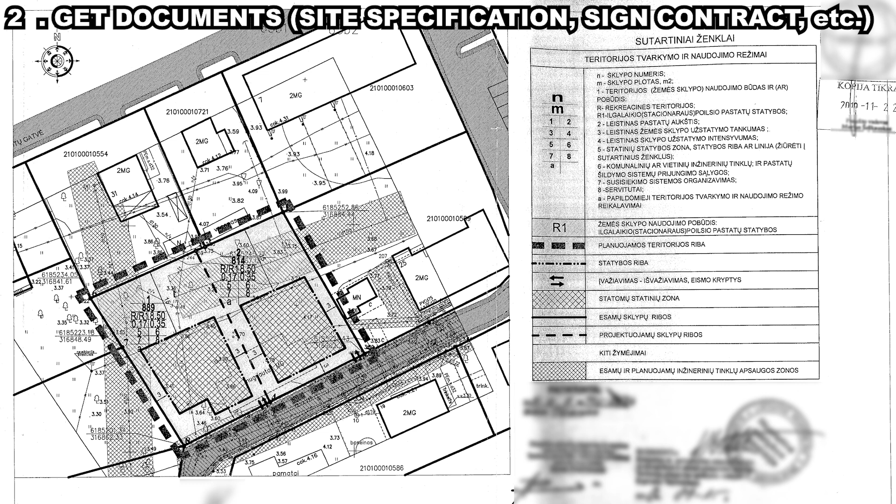This is basically all of the measurements of the site. The most important ones are the restrictions for how intense the site is, as well as, of course, the size of the site.

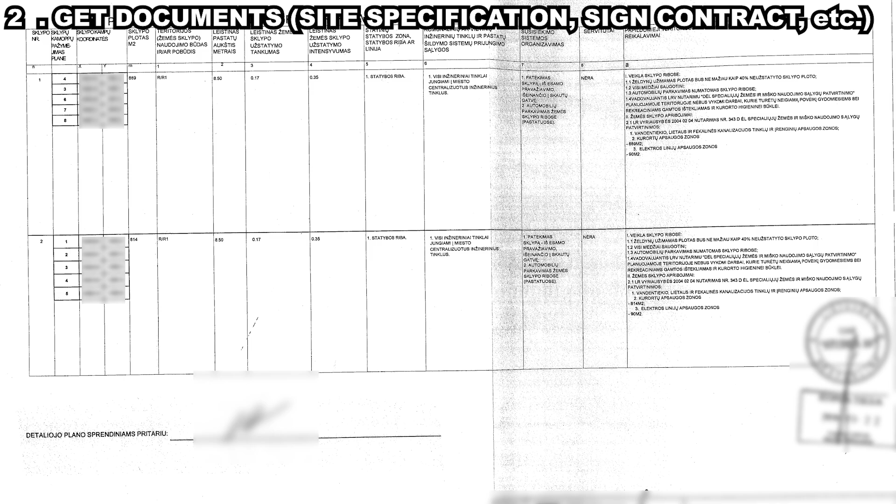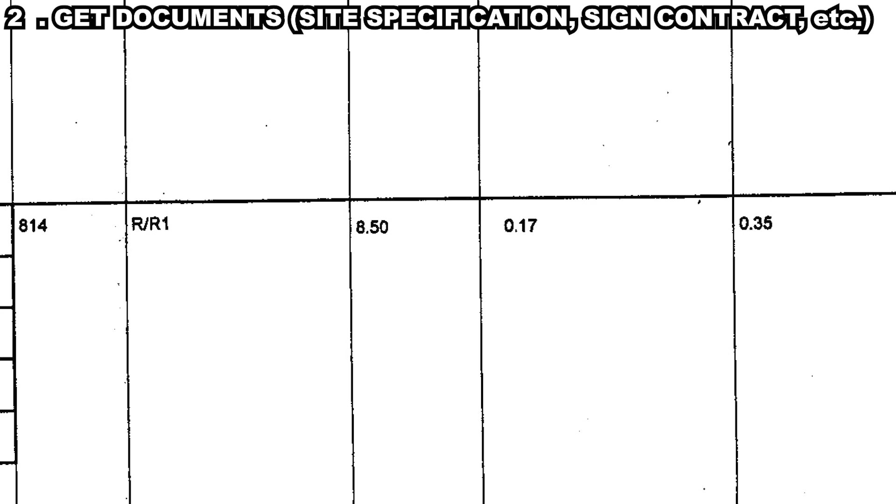As for intensity, currently the density is set to be 0.17, and the intensity of the site is set to be 0.35. That means, let me grab a calculator - if our site is 814 square meters and we multiply it by 0.17, that means the footprint of the house, together with all of the consoles, everything sticking out from the house, cannot exceed 138 square meters. That means this is a very small house.

As for intensity, that is the cumulative floor area of the building divided by the site area. So if it's 0.35, then 814 multiplied by 0.35, we get 284 square meters. So we are basically forced to build high with a very small footprint. It's a given that this is going to be a 2-floor house.

This is a very important document that I will be referencing quite a bit throughout this initial design stage, where I'm just getting accustomed to the site. The last official document we got is just a register center document, confirming the site is registered in the Lithuanian register center - that one's unimportant.

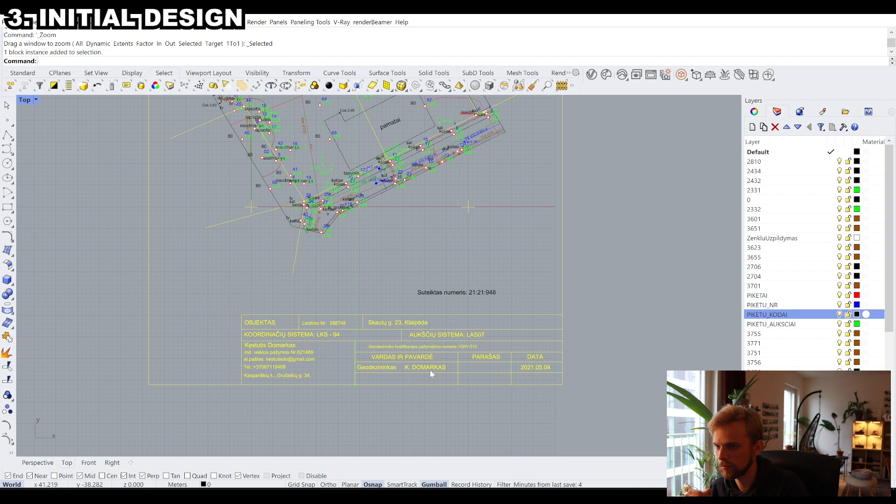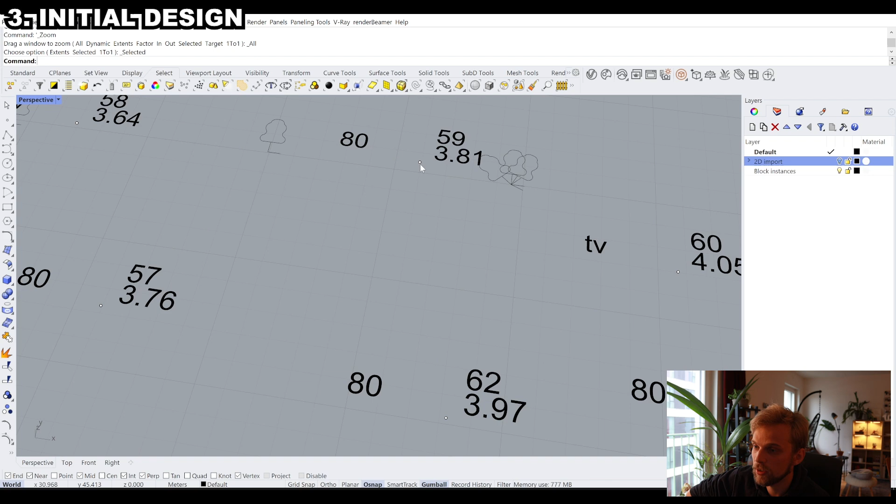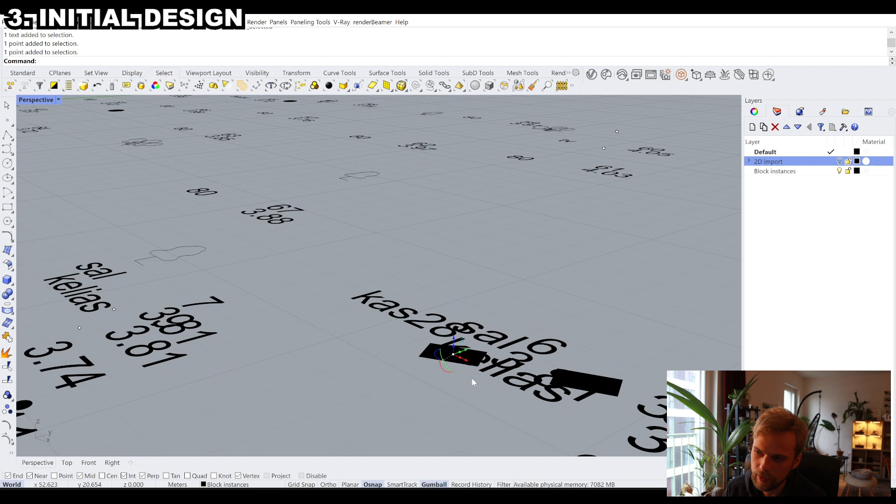During this initial design stage, how I like to work is by first rebuilding the whole site in 3D, just in case the site is hilly, to check the topography, or if there are any trees that need to be kept. As I went through the documents, I found that every single tree on the site will need to be kept - that was a very important statement to react to. So here I'm rebuilding the site, placing the trees, finding the different altitudes. Thankfully the site wasn't that hilly, so at least that wasn't an additional limitation.

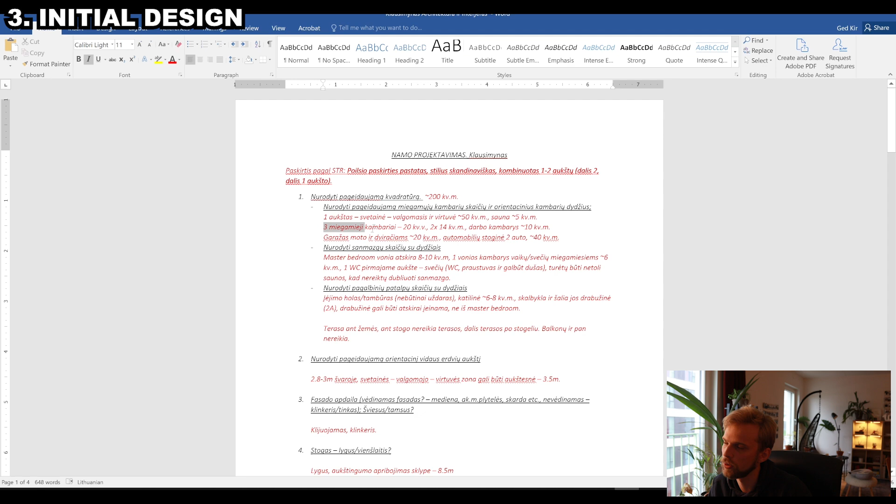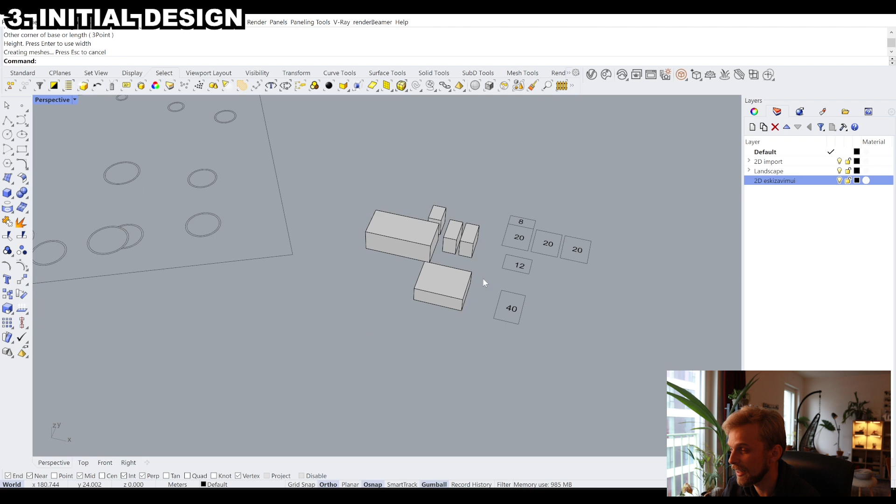But we talked with the client about the huge limitation of the site density, and they said they will try to push the site density to 0.23 rather than 0.17, which would bring us closer to 180-190 square meters for the footprint of the building. That's much more reasonable and will unlock more design decisions, more drastic design decisions, because with a small footprint you can't really do that much.

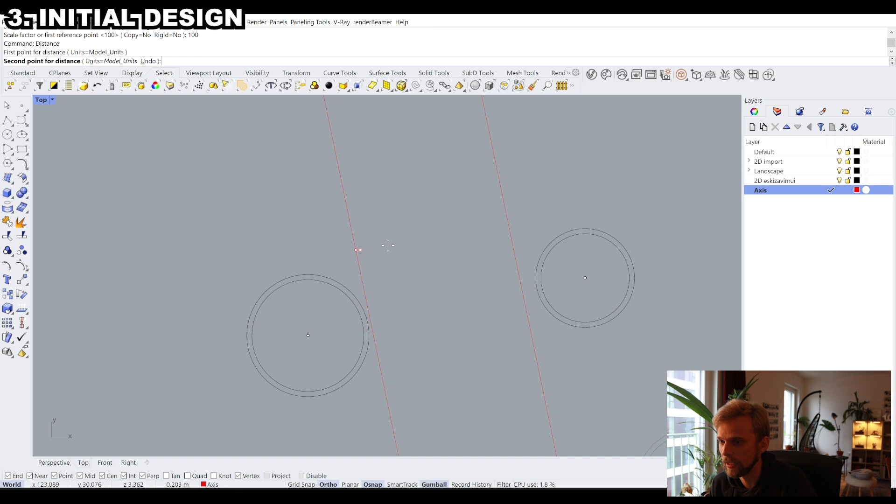So here I'm finishing up the site and starting to create first sketches. As you can see, there's a big tree right in the middle of the site, so this immediately dictates what kind of building this is going to be. We can either do a U shape where the tree is in the courtyard, or a cross shape, but the building will need to somehow go around the tree. That's where I initially started sketching different ideas.

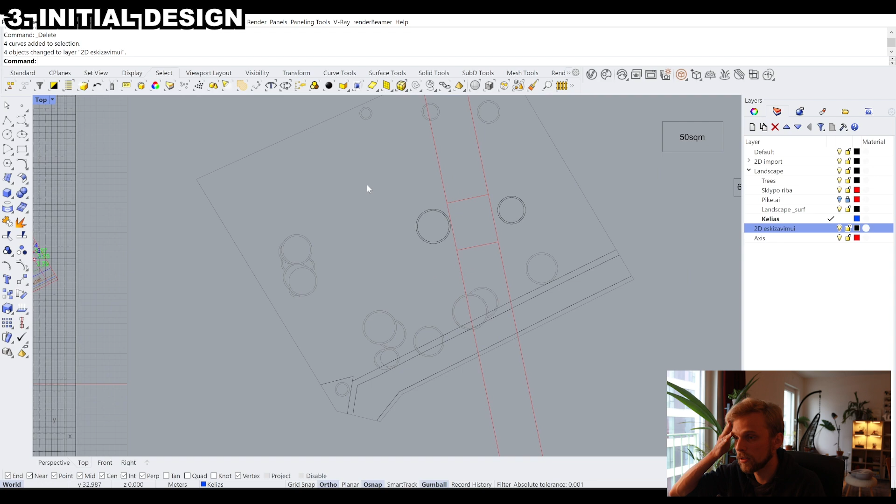I'm going to show you the final result without showing the overall sketching process, because I don't think that's necessary. In total we came up with 3 versions. I came up with 2, and Olga came up with 1 more. We already had our first discussion with the clients.

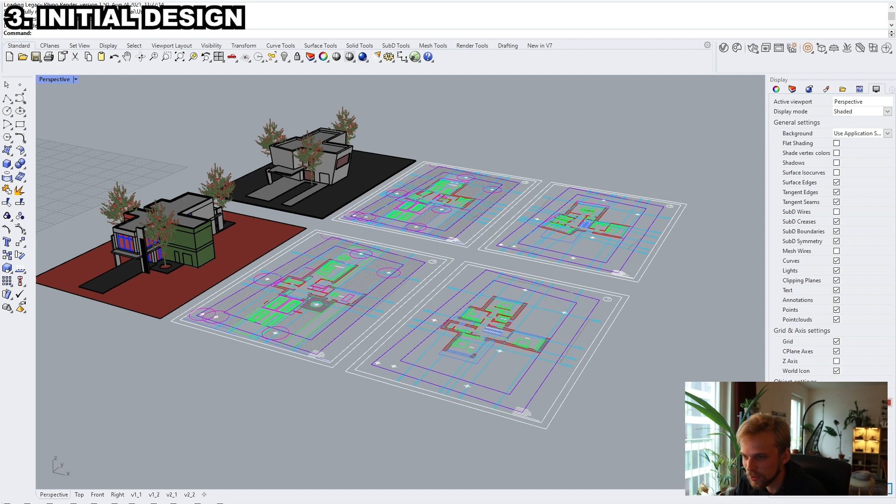But I'll keep it a secret for now. I'm going to go through these versions real quick. The first one will take the longest, but the other 2 will be faster. So I'll start with my version 1, which is this guy right here, maybe switching to Arctic view. Yeah, there we go, this building right here.

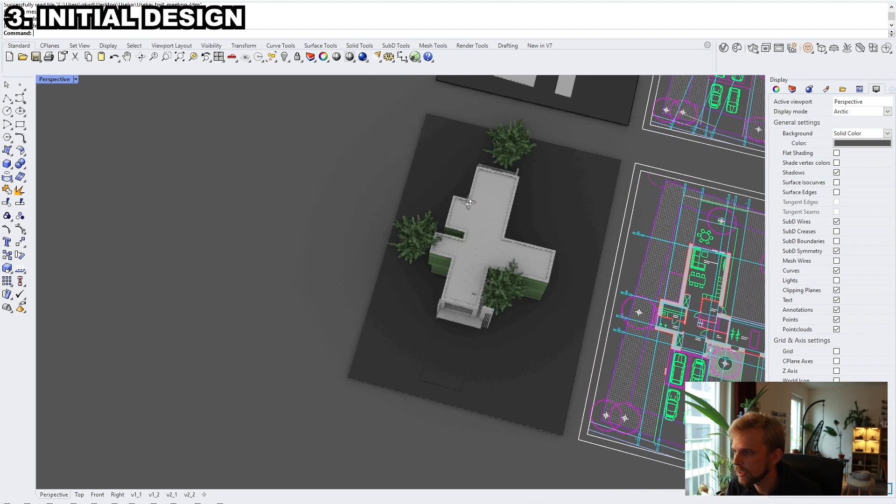It's basically a cross shape. We have a cross shape, and we have this one tree that we can't get rid of. Well, actually 2 more trees were also limiting factors, but this one was the most intense one to deal with.

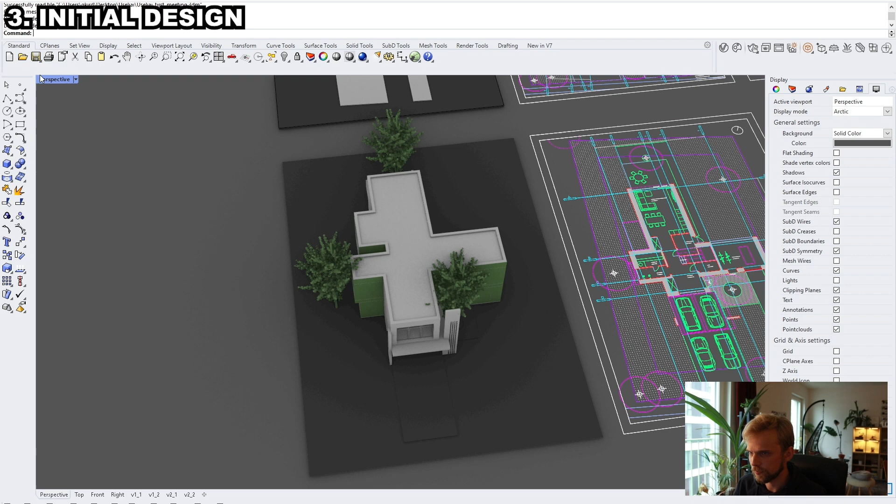So just looking at the drawings, I think I have a PDF open. Yes, I do. Looking at the drawing, we have an entrance right here. By the way, they wanted parking for 4 cars, 2 of them protected from the rain. So you have your parking, you have your entrance sequence right here.

The hallway where you can put down your clothes. You have your shower and the sauna block, and the shower gets a large window with diffused glass, overlooking one of the trees, which I think would create a pretty interesting shimmering effect, because the branches of this particular tree are quite low and it has multiple stems.

North is located in this direction, upwards. So the evening sun will indeed hit the tree, and the shadows would fall in here. That's the first interesting moment of this particular design.

Then as you go through the hallway, you can access the boiler room. The boiler room needs to be pretty big, and it's tucked away underneath the staircase. Then you have the bathroom right here, and the garage for the motorcycle, where you can also fit bicycles.

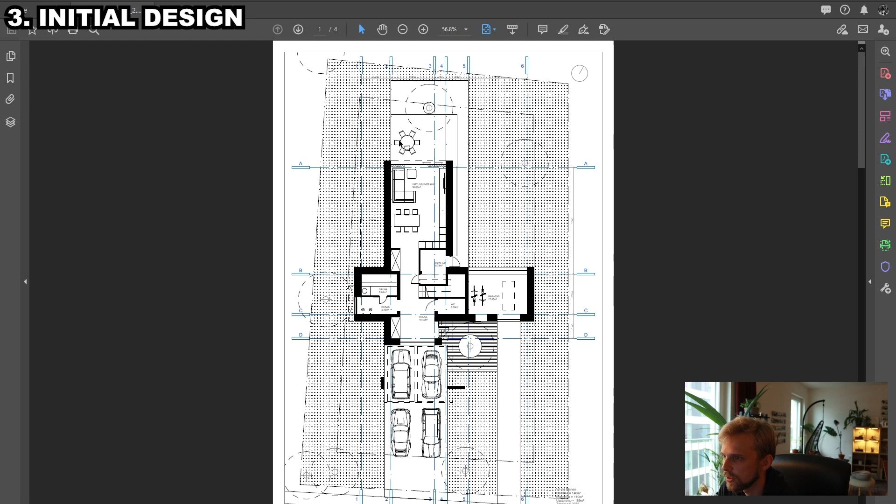Everything else is fine. Then you have the terrace and one more tree right there. If we look at the second floor, you go up and access it, and you have what's a pretty weird area, which I can show you in the 3D model.

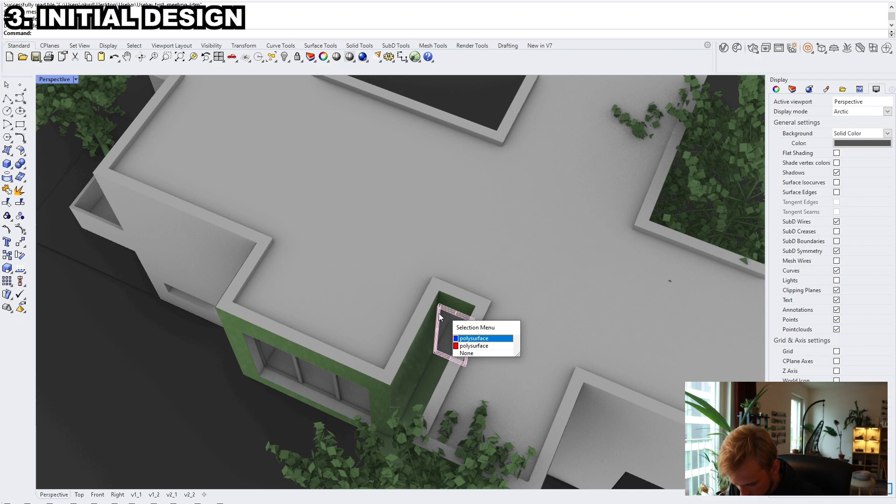It's right here - this window, which leads to nowhere. That's a pretty weird area to have. But again, it shows the tree, gives you that nice evening light. It shines light onto the staircase, and it purely creates this nook.

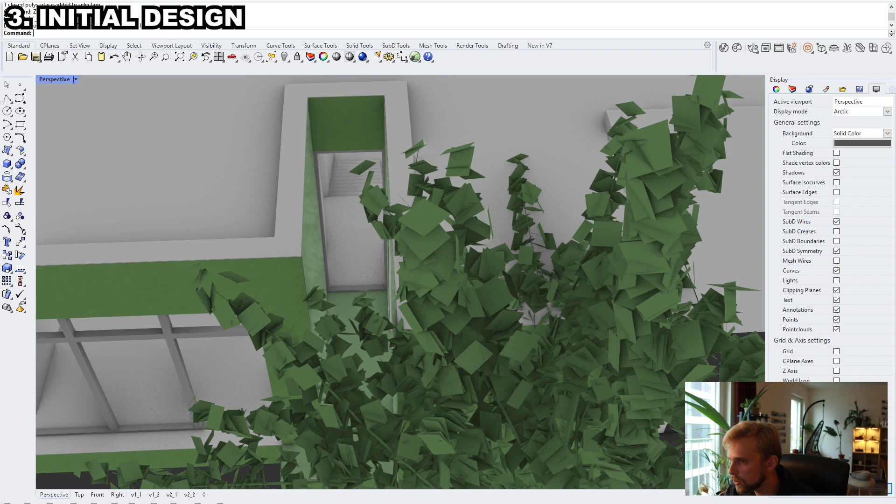I just showed pillows in that nook right here. It creates this nook in which you can just cuddle up and read while you get a little bit of that evening sun in there. I just find it to be romantic. I don't know - would be a bitch to clean though, honestly.

Anyway, moving on, you have the workroom, the office room so to say, and the cloth room I guess, where your washing machines are - these two rooms here. Then you have bedroom 1, bedroom 2, bedroom 3, 3 bedrooms total, pretty generous with the square meters for the bedrooms. And you have the bathroom that serves the second floor with the walk-in shower.

So that's the initial design. The most interesting part about this design is indeed the left-hand side area with this particular tree. Everything else is kind of okay.

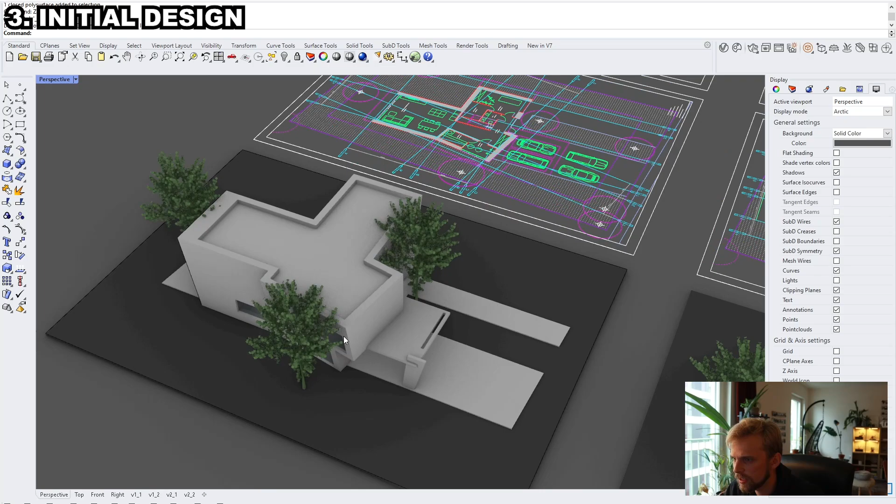Then I decided, what if the client is a crazy one and wants to go a little bit to the weirder side? What if we start working with angles? Given that, I decided to do a second iteration of the design, which was this thing right here, this building right here.

Just quickly showing it to you. So it kind of has the same language as the initial design, only now we are dealing with non-90-degree angles and a little bit more intense plans.

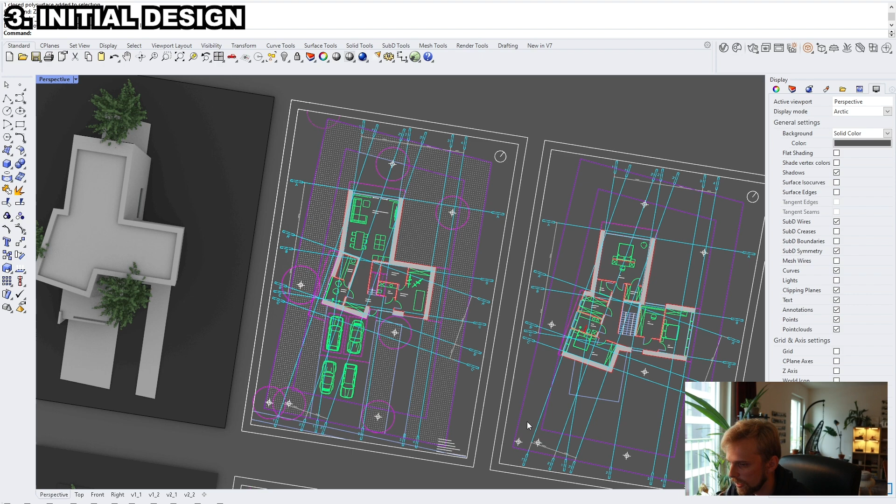So just to quickly guide you through those. Basically, the entrance hallway requires us to take this whole area right here and rotate it just slightly so that this little hallway area opens up and creates more space for you to take off your clothes and so on. Then you have your shower and the sauna right here with the same logic of looking at the tree.

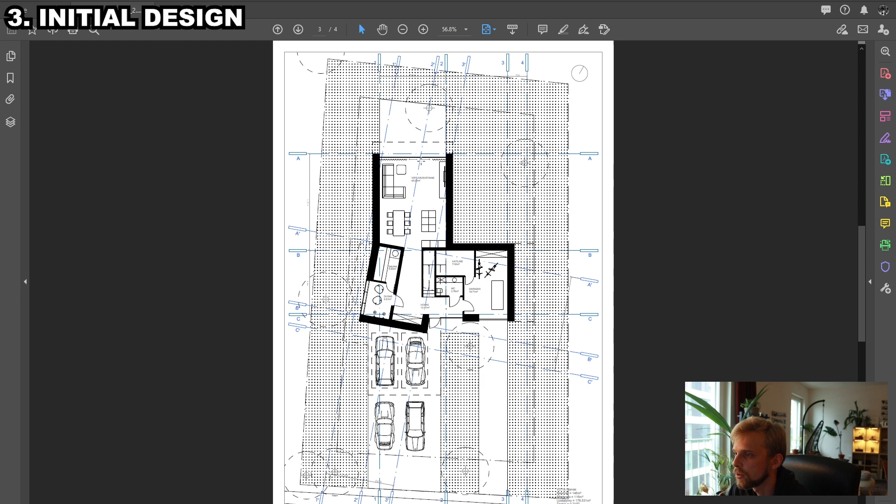The parking logic is the same. The garage is kind of the same. Most of this is the same, but now you get a much wider area for the living room and kitchen, which enables you to create a kitchen island, which I think is a much nicer thing to have than a corner kitchen, right? So this is already a better solution.

And then you have the second floor, which is basically the same thing as we saw before, right? So the second floor didn't change much. So that is the second iteration, second version.

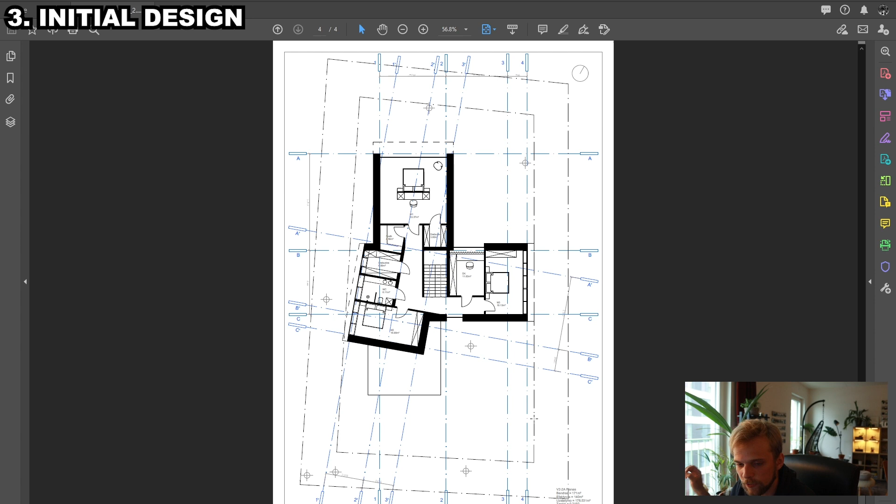In terms of the numbers, the numbers for us to stay in are 0.23. Before it was 0.17, now it's 0.23 for the density of the site and 0.35 for the intensity of the site. So the density of version 2 of this crooked version is 0.22, and the density of version 1 is 0.20, right? So we're well within the range of what's acceptable, even though current density restrictions are 0.17.

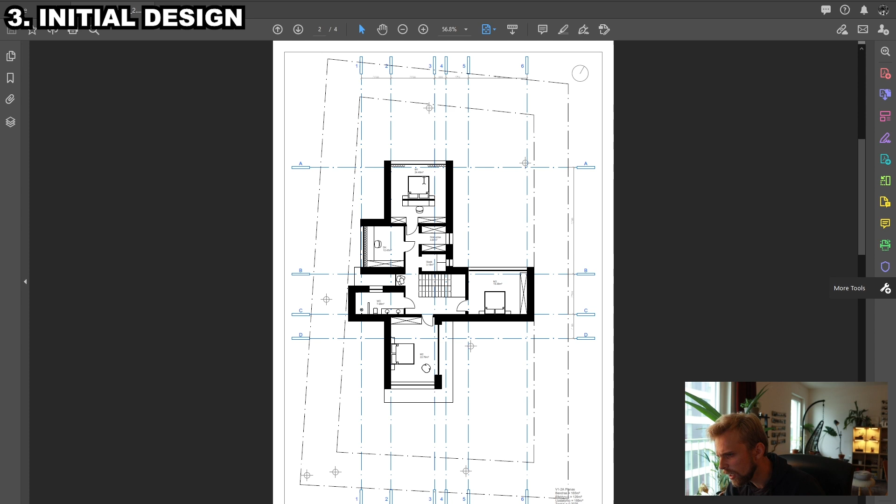And neither one of these designs could be built, right? So we will need to wait and try to apply for a change of rules to the municipality in Lithuania. So that is that, right?

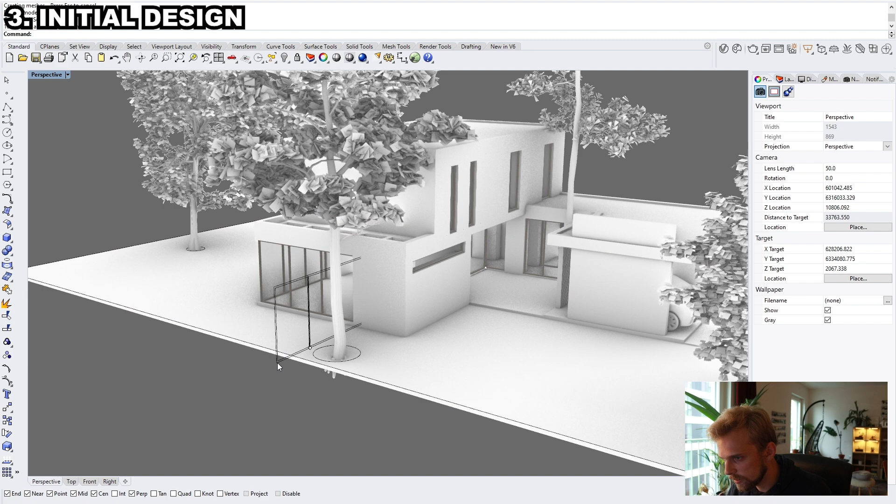Again, two designs. The third design that Olga has done is right here. I should also change this to Arctic view. There we go. Let me just... why can't I select these curves? So SelCrv just for a second, hide. Come on, sorry about that.

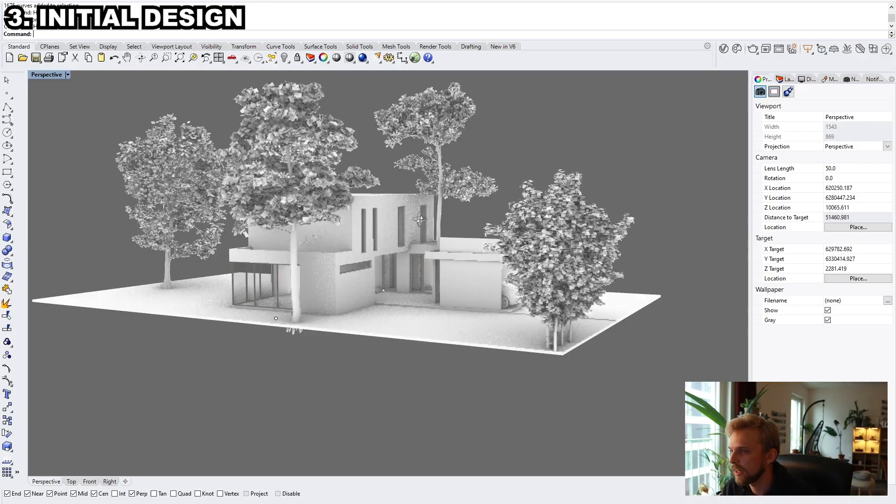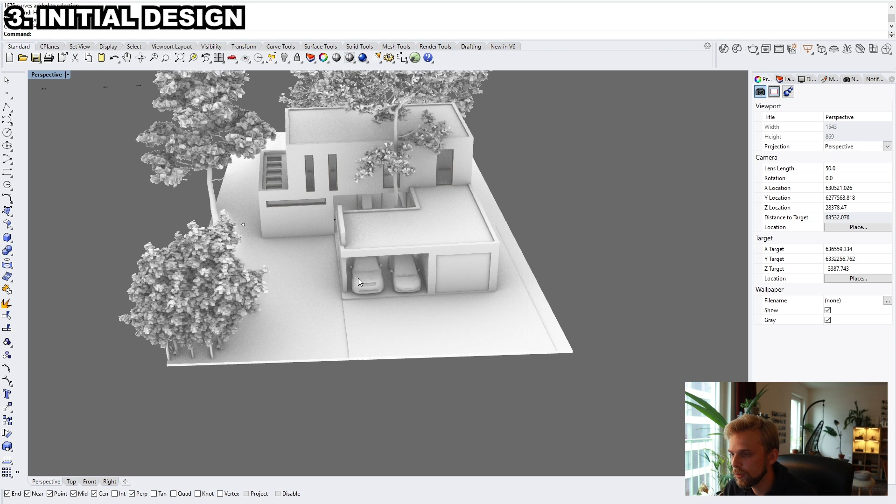So this is the initial design from Olga's part. A much, it's a completely different take on this, right? So here I will draw a cross right here. Instead, Olga has hugged the tree with her building, and she has space for 2 cars underneath the roof and 2 more cars right here.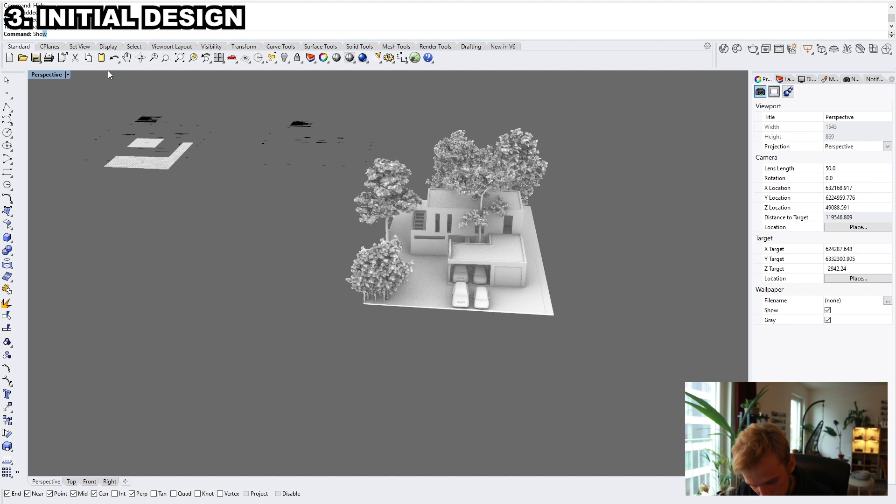And then you have the rest of the building. So only this portion here is 2 floors, right? Everything else is 1 floor. This is the design. And if we look at the drawings, which I have right here, the basic principles are the entrance to the building is right here.

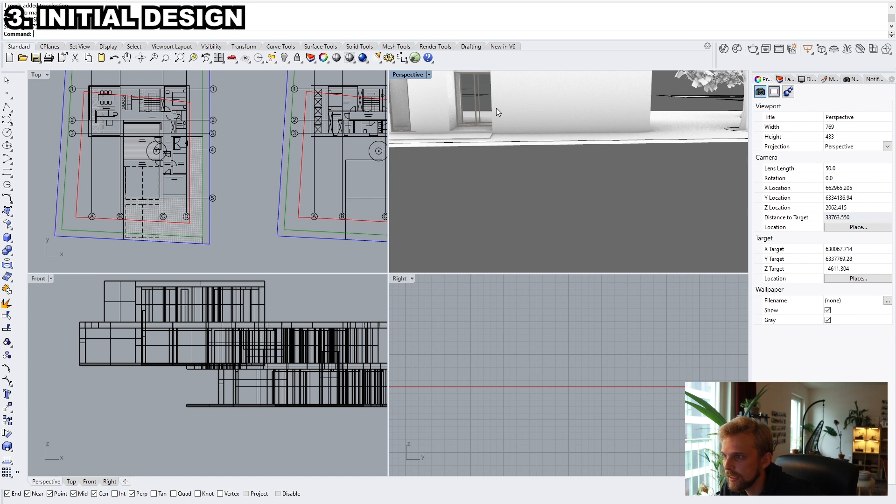I will also try to show it to you here. The entrance is right here, and it's a see-through entrance, meaning that as you enter, you can go through the volume of the building and enter the inner courtyard straight up, right? So this is a pretty nice solution. Pretty nice solution right here.

The hallway is pretty small though, doesn't matter. Then we have the boiler room and the garage right here. So all of the technical stuff is located right here in this area.

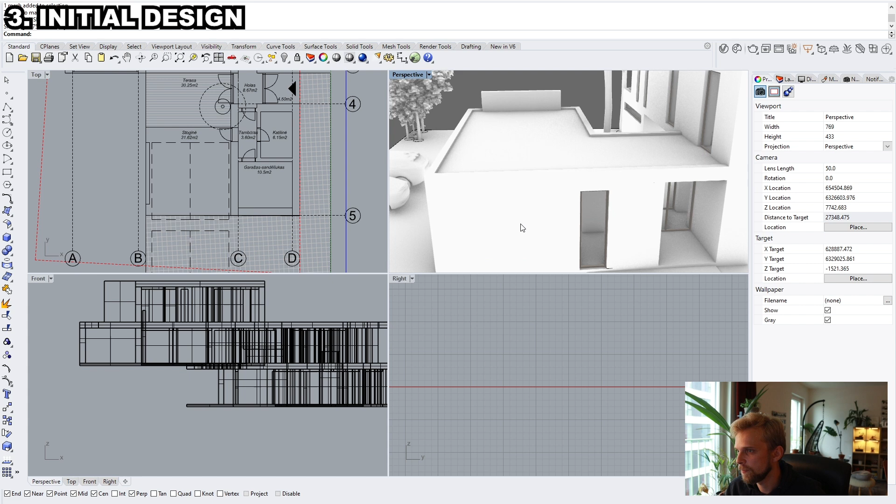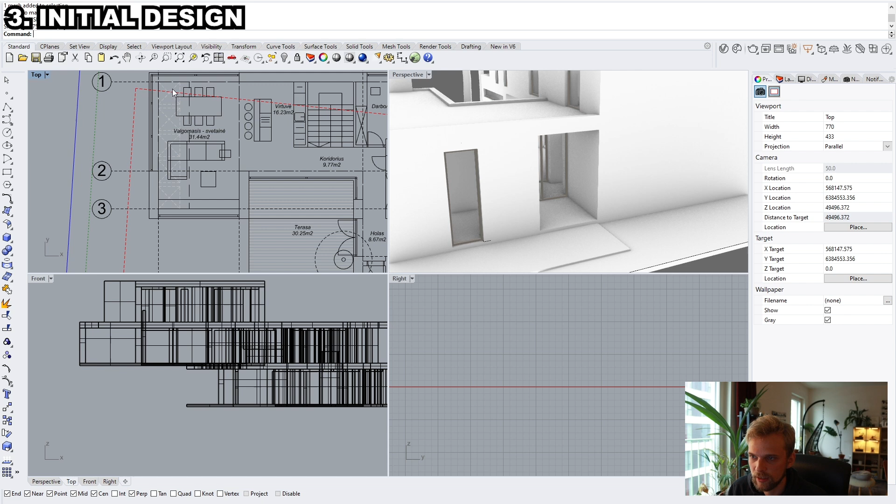And then as we enter here, first we are greeted by the sauna and the bathroom. The sauna and the bathroom are located right here. And then we have the workroom, the office space right here, the stairway to the second floor, and the kitchen with the island and the living room situation with a corner window, which is right here.

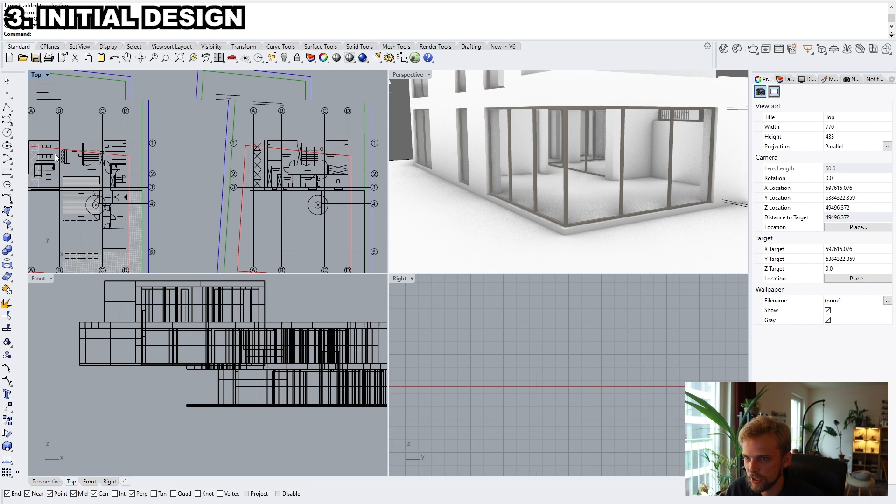You can see that currently the designs are empty. We don't spend unnecessary effort on something that will be changed either way. We just need to get yes or no from the client with these designs.

Second floor, sorry. You go up and you have bedroom 1, bedroom 2, and... find bedroom 3. Oh, she didn't make a third bedroom. Okay, sure. Oh yeah, the third bedroom is the workroom. So the workroom kind of doubles as a bedroom as well.

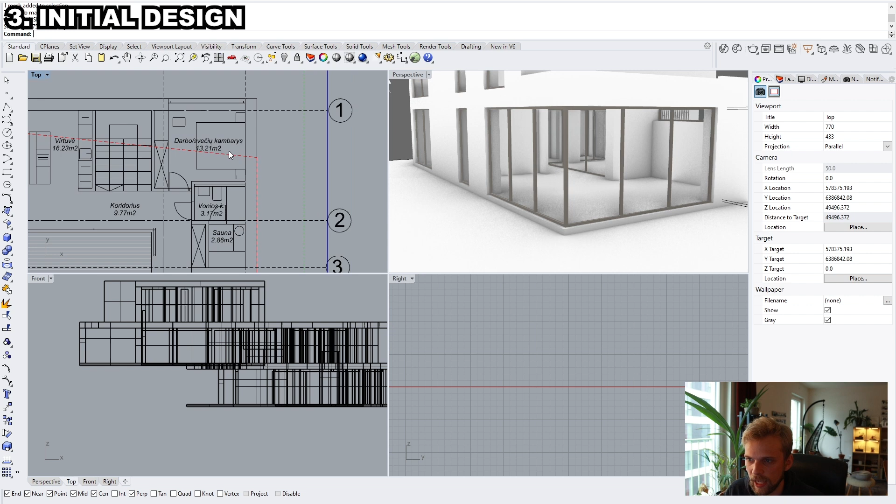And then you have the bathroom and the closet, like the walk-in closet right here. Also an interesting note is these skylights right here that were designed. I find them to be charming, right?

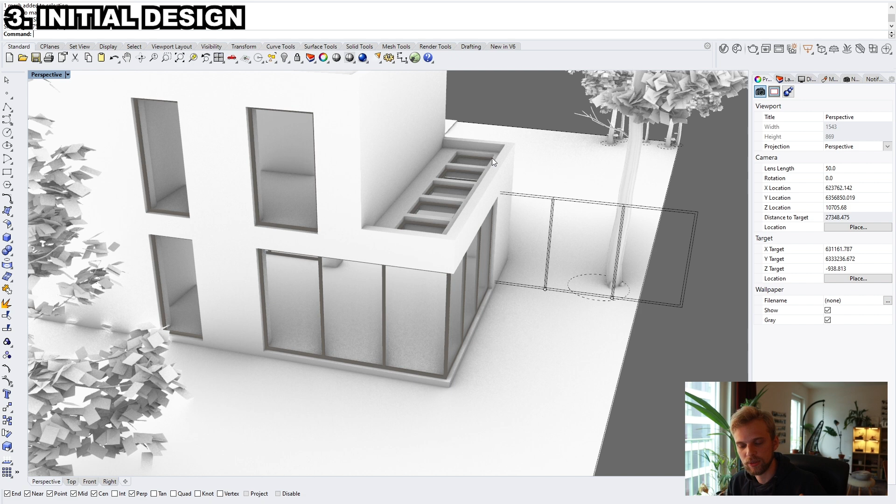So these are the three designs that we showed to the client and talked with the client about, which moves us into this design iteration phase. So the next phase, design iteration. Usually you know that you are in this phase right after the first meeting with the client.

Because you then see how many things will need to be changed, and from here on out it's going to be a negotiation between what you want to design and what the client prefers and wants to be built. It's always this kind of middle ground you need to find for both you and the client to be happy.

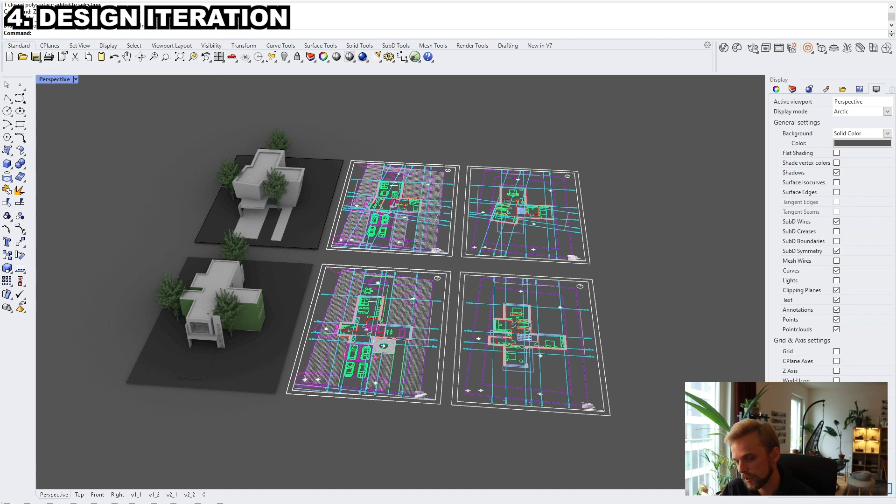You coming up with a design that you enjoy, and the client also feeling that he or she was heard. I didn't record the meeting with the client, and I think that's good because it took like 2.5, 3 hours, during which we discussed all of the benefits of all different iterations, all of the different versions.

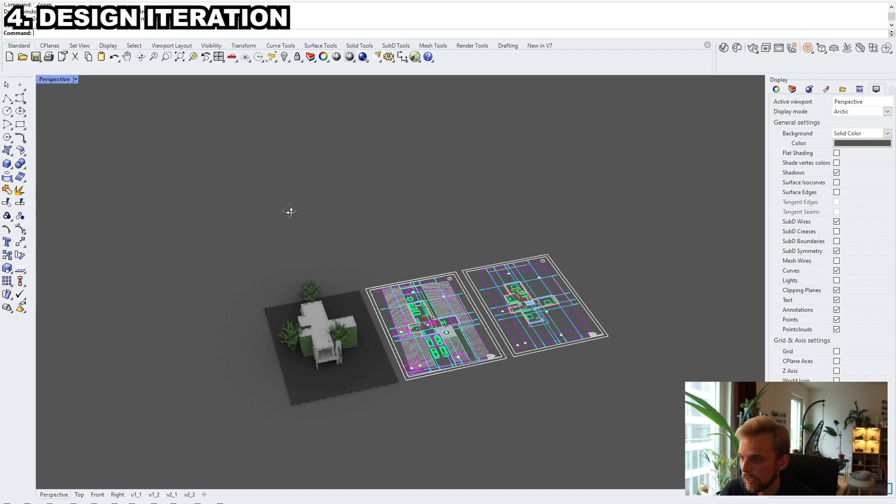During that meeting, this version right here was a definite no-go from the client and was immediately dismissed, which is fine. I understand that this kind of design is not everyone's cup of tea. So we got rid of that altogether and started talking about this iteration right here, as well as Olga's version.

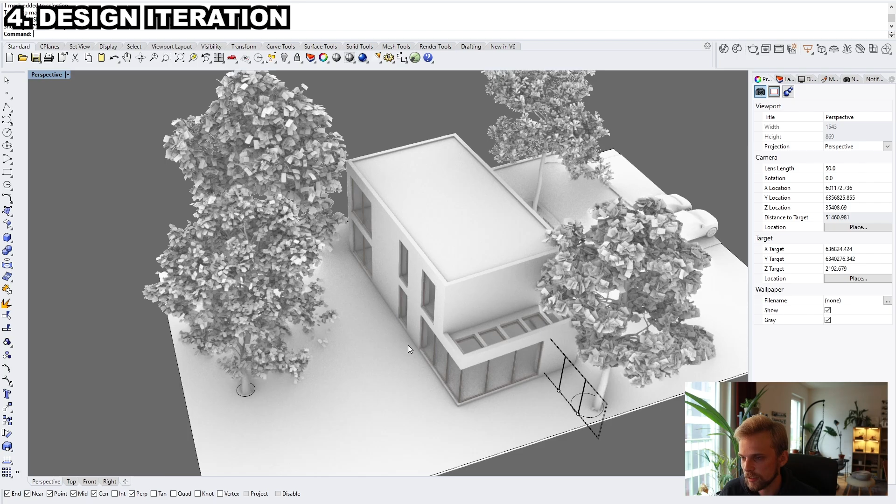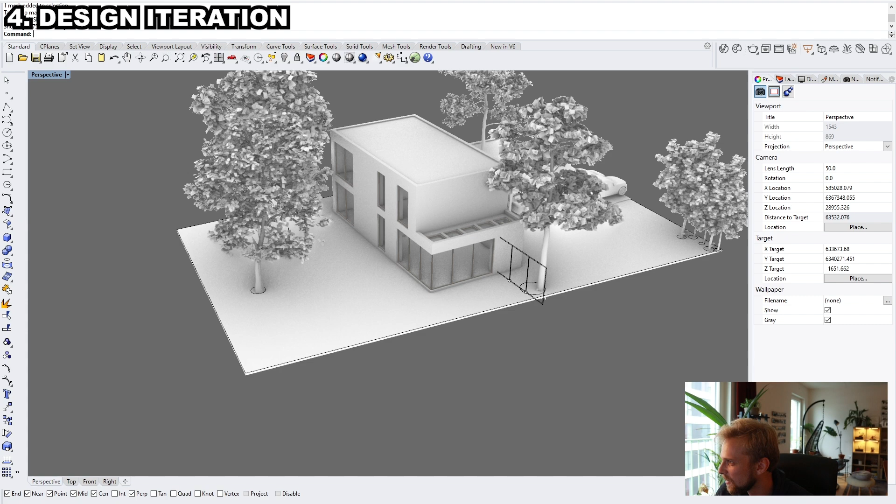So for Olga, she got some criticism in terms of this particular facade right here, as well as some minor adjustments here and there in terms of the house. And for me, I'm not going to talk about every bullet point the client mentioned, but from the 3-hour meeting there were a few discussion points. I'll talk about what the client marked out for me in my particular design.

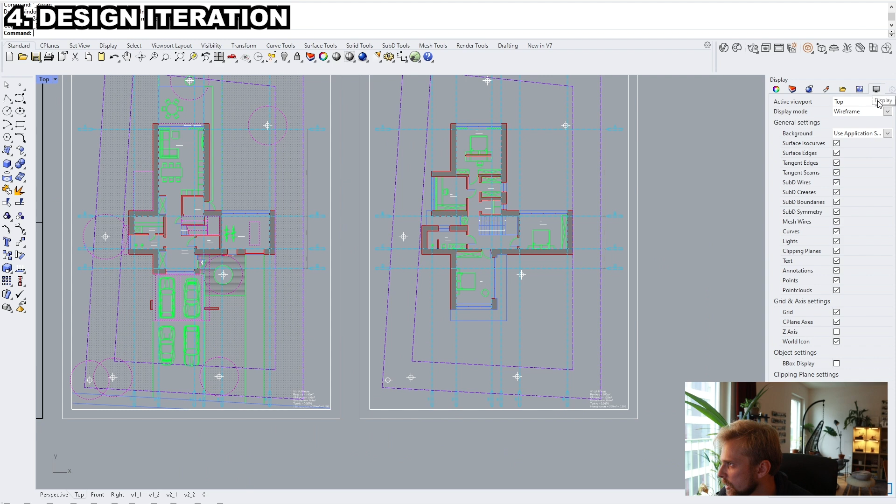So for this design, can we, sorry, just give me a second. There we go, this is going to be easier to see. So for this particular design, the client didn't really like how bulky the overall building looked, how heavy it looked.

So that's one thing I will need to tackle. Also, the square meters of this building were too much, so the client wanted the building to be shrunken down to be a little bit smaller.

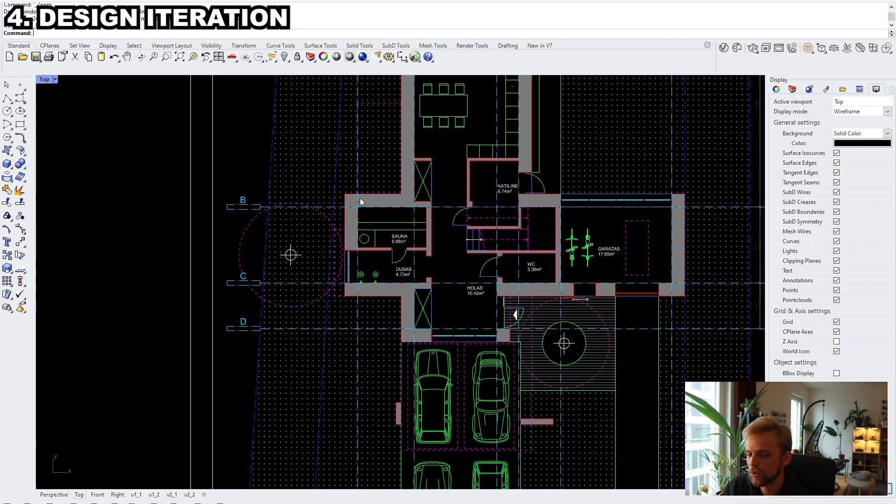This particular area right here was a little bit too close to this tree, so we had to cut it out. And as I mentioned before, the kitchen was quite a weak part of this overall proposal, so the whole area right here will need to be reworked.

And since this whole area will need to be reworked, the overall form will change drastically, right? So it's a complete remake of the building, but that is absolutely expected at these stages.

So from here on out, we will be doing 2 variations or 2 proposals instead of 3. After our next meeting with the client, we will decide on the, let's say, winning proposal. And from there on out, we will be doing design iterations with only a single proposal, be it mine or Olga's.

It absolutely doesn't matter, because at this point I believe that after we make these adjustments, both proposals will have pretty interesting and pretty nice designs. Considering that this is a 3 or 4 day design, I think we can pull through with this building and make it quite interesting.

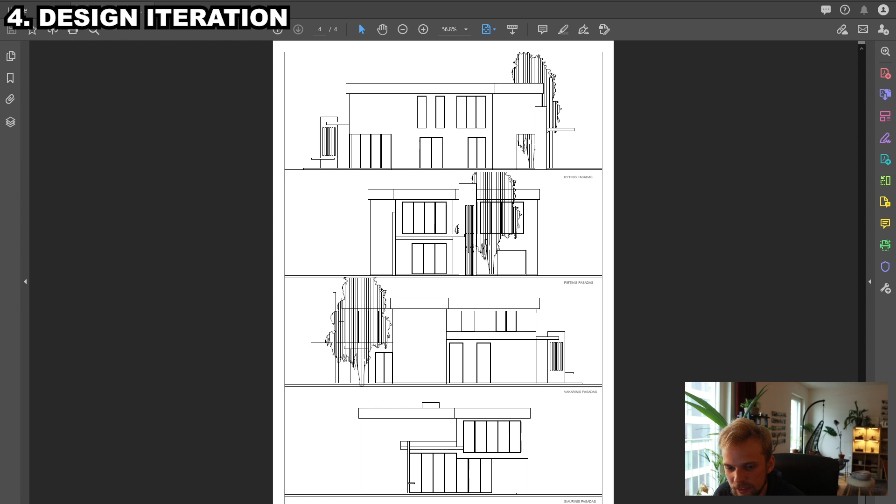I do have, let me show you a real quick sneak peek. This is a sneak peek for the amended design. There we go, that's it.

I'm not gonna show you the 3D model, but we have already made the second iteration of our designs, and we will be sending it to the client for them to prepare their remarks, and we will have a second meeting with them. Once that meeting is done, I will begin recording the second part of this video series, talking about the next stage, what we're going to be doing.